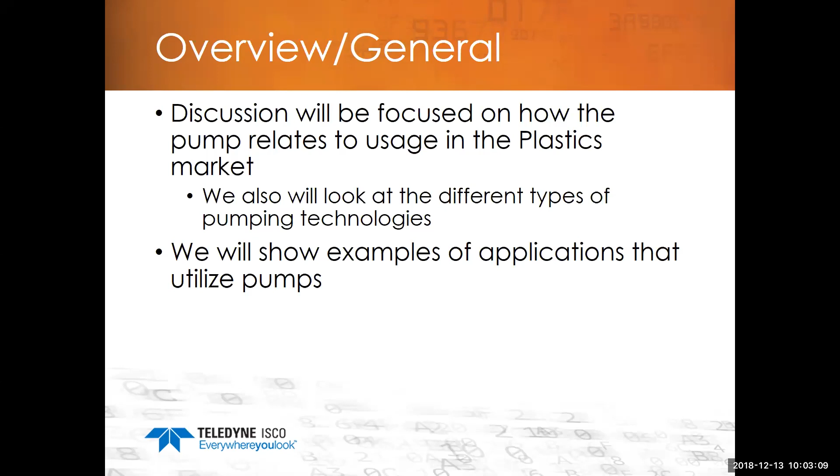So, where do pumps play in the plastics space? There are many ways to utilize pumps. A couple of applications: providing constant pressure to move material around, dosing of material, colors, etc., or injecting CO2 gas or nitrogen gas into the process. There are many types of pumps used in plastics. We will focus on syringe, reciprocating, and peristaltic pumping technology.

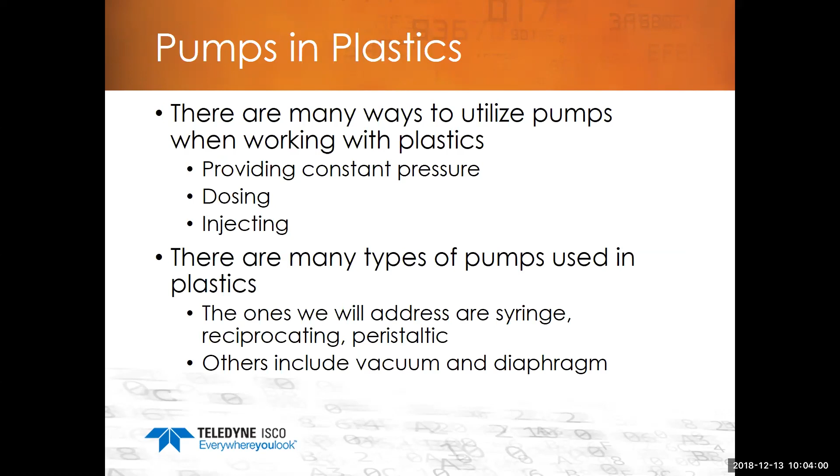Other types of pumps you will see will be vacuum pumps, especially with vacuum forming as a type of plastic product creation, but diaphragm pumps also play a role in that space. So as we look at pumps and how they would be used, you need to consider a few factors of what you're trying to accomplish.

First off, you have to look at the flow rate. How fast do you want the material to flow? With the different pumping technologies on the market, you've got very broad ranges, down to 0.0001 milliliters a minute up to maybe 200, 300, 400 milliliters a minute, or even larger in some types of pumps. So you have to determine how precise the flow you need is, and what the actual flow rate is you're going to need.

And then also, you're going to add, I call them reagents, but you could add colors or mixtures into the process. So you need to know the clarity of that type of material, because sometimes the flow rate, if it's too fast or too slow, can change the shape, the size, the color of the material you're processing.

A second consideration is pulsation. Many plastic processes are continuous draw, continuous flow, so pulsation can greatly affect the outcome. When you're working with an extrusion process, you need to make sure that your flow is very steady and smooth, because even the tiniest blips will impact the material you're creating, or even the colors or the types of things you're using.

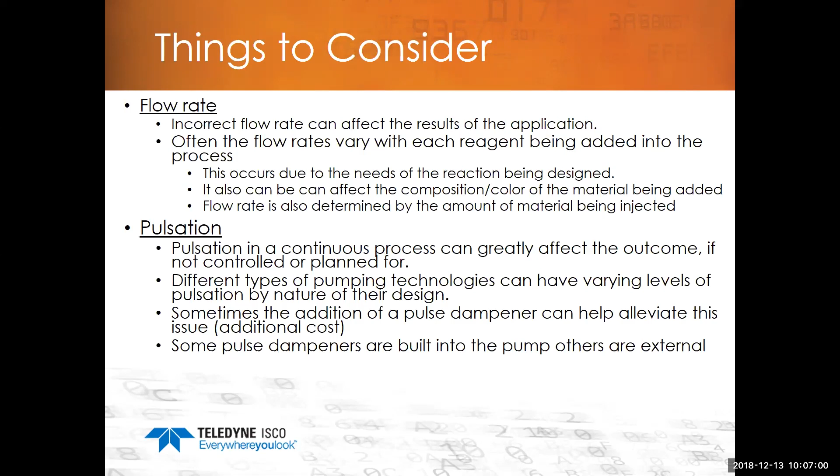Moving on, other things you want to really consider when you're trying to choose a pump or set up a pump in your plastics process is the pressure. The pressure capabilities are very important. In some applications, I know in the rotational molding aspect, pumps are used just to provide pressure, to push all the little materials out into very intricate rotational molds.

So you want to make sure if the mold is very detailed, that the plastic gets into all the crevices it possibly can. So you provide the back pressure of some CO2 or nitrogen to make sure all that plastic gets out into those crevices. That would have to remain constant. It cannot have any fluctuations or dips or changes. So you really want to look for pumps that can do that.

Footprint is a big deal. The pumps vary in size and shape. You'll see that shortly. But you have to look at if you need something that's very precise, or you can live with a little pulsation. Do you have the room where the machine or the process is to set a syringe pump? If you don't need the extreme precision, you can go with a smaller reciprocating pump that can sit on a shelf or be built into the actual extrusion machine.

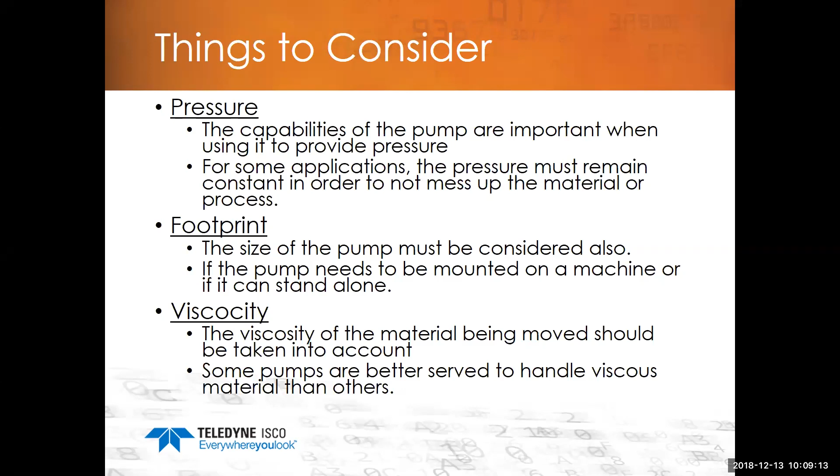So those are things you want to consider, because sometimes that doesn't get thought about until after you've purchased the pump. Viscosity is another thing. Many plastic materials or chemicals that we input into the process, or the colors, the paint, can be very viscous. So you need to make sure that the pump can handle moving it and it doesn't gum up. Again, that's not really pulsation. Reciprocating pumps typically have check valves, and check valves do get gummed up sometimes and don't work smoothly. So you need to make sure it's the right pump for the material you're trying to move.

Other considerations: do you need to move the pump around? We talked about setting it on the machine. Does it need to be disconnected and used in another process? If you have a couple of different extrusion machines and only one or two pumps to share, do you need to be able to do that? Is the pump scalable? Sometimes you have a small process where you're testing out the right color mixture, the right size and shape of the bubble or the foam. Can it be moved up to produce much more? Or do you need to replicate that same line 10 times?

Is it single or dual head? That's a very interesting question, because dual head is more of a continuous flow, so you're going to get a little less pulsation. It's not going to be as precise as a syringe pump, but a dual-headed reciprocating pump does minimize some of the pulsation in the application. And if you add a pulse dampener, you're getting it down as tight as you can. Still not as strong as a syringe pump, but very close.

And then what other stuff do you need? What is the impact on the project cost? That's all stuff we're familiar with. But you want to think about how you're going to be using the pump. It's not just, hey, there's a pump that does this flow rate, let's buy it. You've got to consider, can it get to the flow rates you need, and what do you sacrifice to get there? Are you sacrificing pressure? The ability to move a heavier, more viscous material? Those are things you need to weigh when laying out your process.

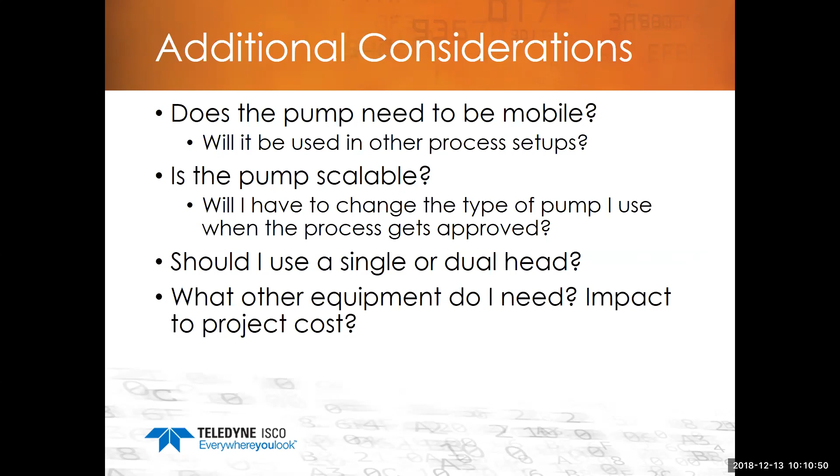So let's talk about a couple applications where we currently participate. Chemical color additive to the extrusion process, especially twin screw extrusion. We have an application diagram a little farther in the presentation to show you how we play there. It's color additive, it's also adding CO2 to the process. There are many different ways we participate with extrusion.

CO2 usage for foam processing. We have an organization up in Toronto, the University of Toronto, that does a lot of research with foam creation, and they use our pumps in their processes and in their research. Many of their doctoral students will present to vendors and customers, and they prove their thesis using the syringe pump.

Polymer pulling, especially hollowing out polymer tubes. We have a couple universities across the country. Georgia Tech is one of them, and University of Nebraska-Lincoln here is doing research on using polymers for different types of applications. And they're actually using two of our pumps to create the polymer tube and then inject a fluid into the middle to hollow it out, so then the tube can be used for something else. So these are a couple applications. We're going to talk about some of these as we go over the next few slides.

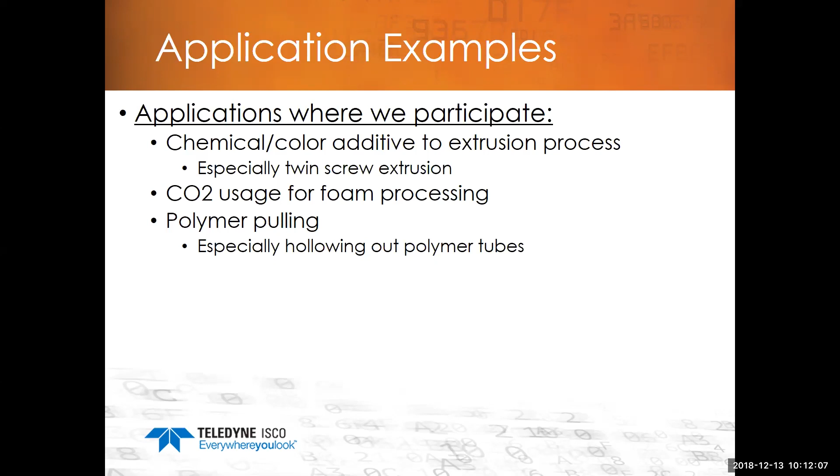Here's one here for polymer creation. This application here, any of our pumps, and you can see right just above the bore fluid there, the little diagram says syringe pump. Universities, as I said, are doing the research for polymers across the globe, and they're employing our Teledyne D-series syringe pump in that process.

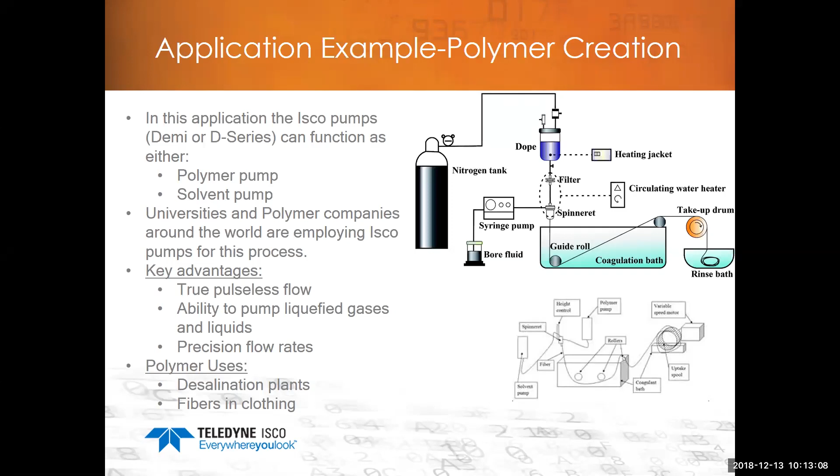Why? Well, there's true pulseless flow. We talked about how if you're pulling a polymer strand, you need that to be as smooth and pulseless as possible. You can't have jagged blips or anything else, because that would ruin the material or the actual polymer. It can pump liquefied gases, and it's very precise down to the flow rate. So that's very, very important when you're looking at polymer creation. Some of the uses for these polymers, we talked about creating the polymer tubes. Well, you can tie them together and use them in desalination plants and other types of things. So let's go to the next slide here.

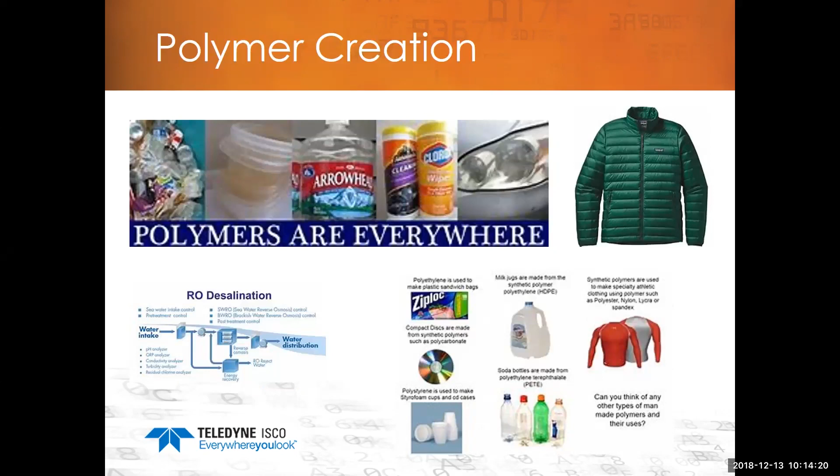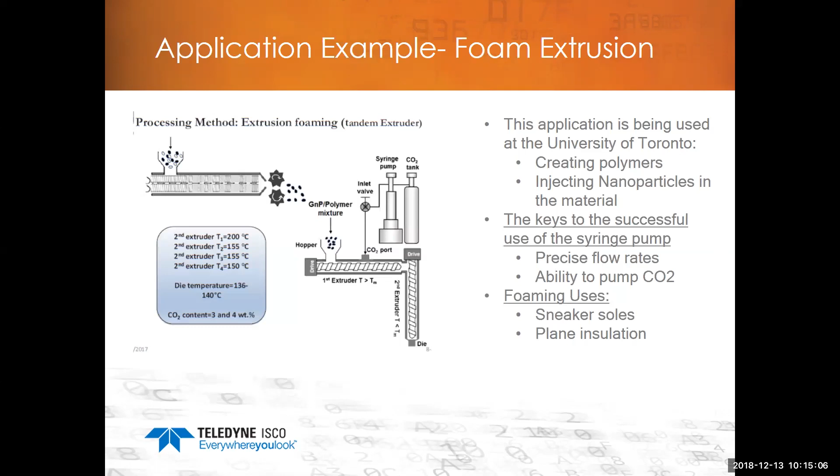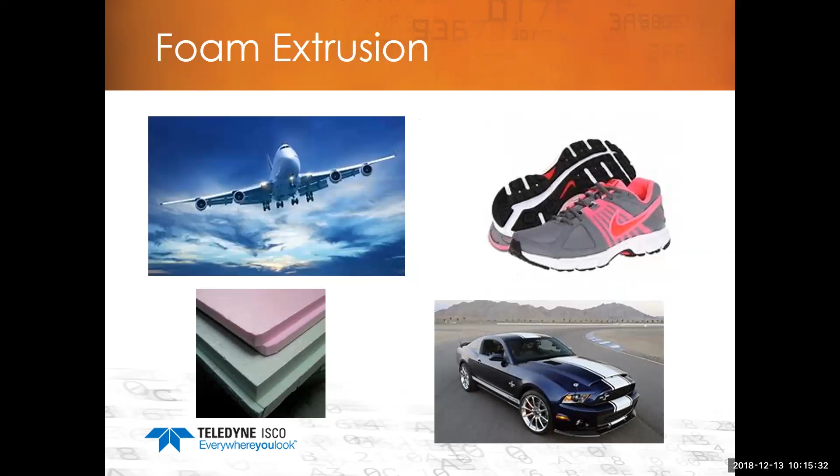So these last two applications are very focused on the syringe pump technology and how precise and pulseless the flow rates are. This is part of the foam extrusion process, something you need to stay aware of. A couple of things that come out of foam extrusion: the insulation in airplanes and some cars down below, the sound deadening, etc. Sneaker soles, many companies create soles with compressed foam, and obviously styrofoam panels. They can be used anywhere, right? So these are just a few examples of everyday things that are using the process where our syringe pumps supply.

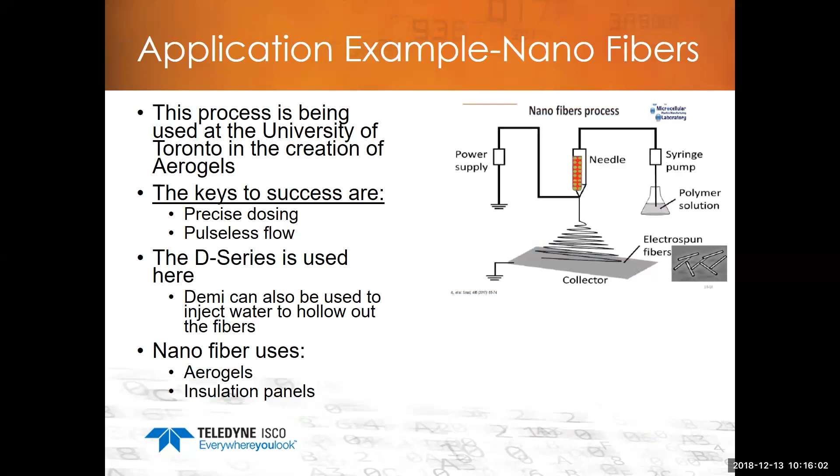As we keep going here, we talked earlier about nanofibers, or injecting nanoparticles into a material to reinforce it. The whole carbon nanofiber reinforcement of products or walls of cars is very real, and it's something that's happening quite a bit. Again, the University of Toronto is doing some work in this space, and they needed the precise dosing and pulseless flow. So there we go. It's perfect for a D-series.

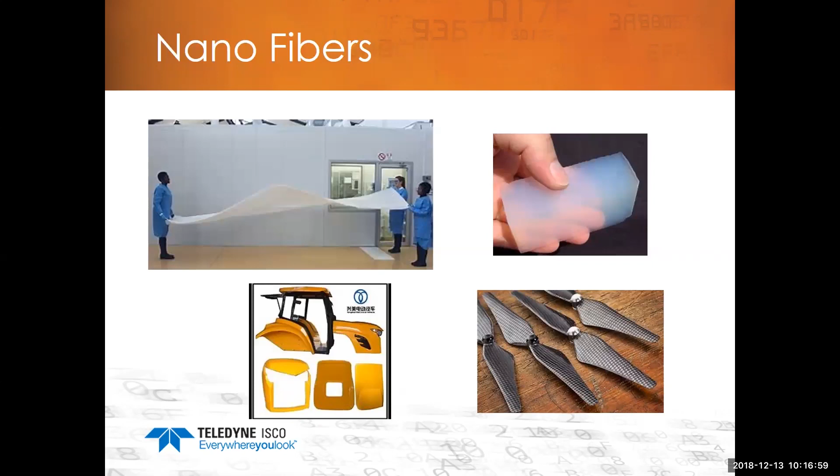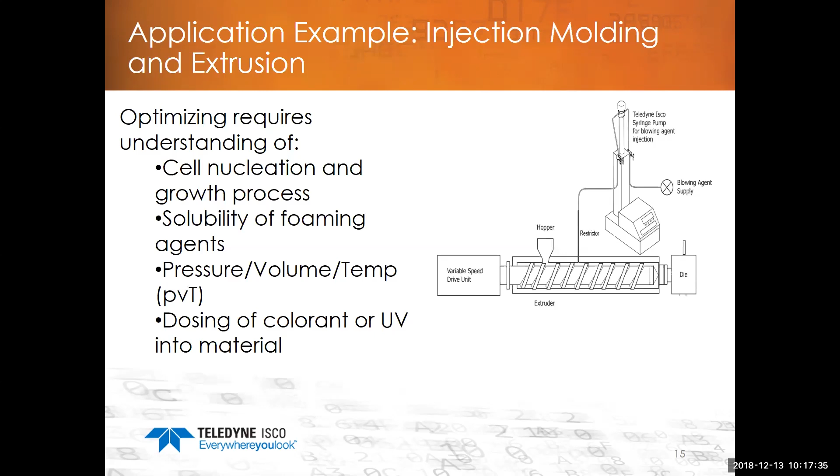Next one we have, injection molding. This is actually an application note we have that is showing you how to use pumping CO2 as a blowing agent through the extruder. Some of the other things that would happen here, in this case, you could use a small reciprocating pump that would add color or UV protectant to the extrusion process. So instead of worrying about the pellets and everything for the color, you can just inject liquid into there, and it'll get smooth and run through the process.

Some other applications that we haven't really talked about. It's not necessarily plastics, but it is kind of in that vein, is using the D-series or a ReaXus with a pulse dampener to put a protective layer of silicone onto semiconductor wafers. That's a very smooth, straight process, and as the semiconductor wafers come out, they get coated with the silicone.

And then, as I said earlier, they're providing pressure to the rotational mold machine to ensure the material gets into all the detailed crevices of the product that you're trying to create. Because sometimes as we start to use more plastics and find more ways to use plastic material for things, the molds will get much more intricate.

So as we kind of tail up to the end here, let's talk a little bit about the different pumping technologies, and let's talk about advantages and disadvantages of them, and try to relate them back to the plastic space. So first and foremost, we're going to talk about syringe pumps. Shocking, right? Because we talked about the examples in some diagrams previously.

Well, syringe pump technology is a long-lasting design. It's pulseless. You have very, very precise flows. You can get some really high pressures. You really won't need too high of pressures in the plastics process from a pumping standpoint, but it's there if you needed it. Some of the drawbacks are there's an expensive initial investment. Not going to lie about that. But so is an extrusion machine. That's not exactly cheap. So the product will fit in there nicely, and it's got a large footprint.

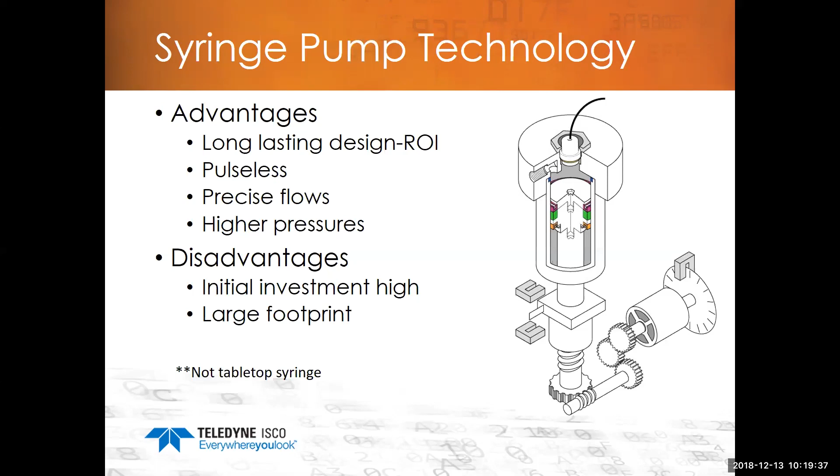Next type of technology we'll talk about is reciprocating pump technology. You can get up to some pretty high pressures there, up to 10,000 PSI or even more. It's a little bit lower flow. It's a very proven, common design. Very simple, kind of like a train engine, right? Chugging back and forth. The drawback here is it struggles with viscous fluids. As we talked about earlier, viscosity is something you really need to consider when you're selecting the type of pump you want to use.

Reciprocating pumps typically use check valves. They do tend to jam up sometimes with some sticky or viscous fluid. So if you're really concerned, or if there's even an outside chance that the viscosity is going to be kind of touchy, you need to maybe look at either a different pumping technology, or be aware that this is going to happen and build something into your process to be able to check the valves or to keep things clean. And it's not pulseless.

On the pulseless continuum, the D series syringe is going to be the best, and reciprocating pumps would be next. You can add a pulse dampener to help that, but it will not get it down to the levels of the syringe pumps.

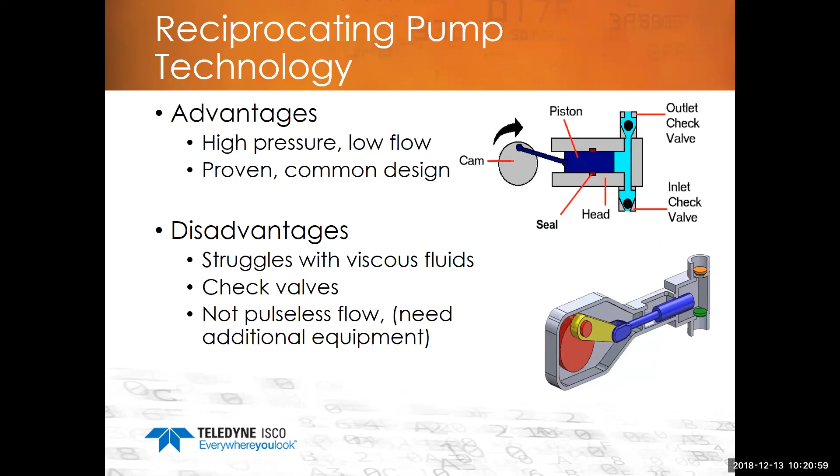When you look at what Teledyne ISCO has, we have two different types of reciprocating pumps that would be really good for this market. Here is just a very basic model. It's built to just move fluid, move material. It's 100 mils a minute, 2,000 psi with an optional pulse dampener. Very generic, all-purpose pump, low cost, and will fit very nicely on an extrusion machine or any machines you have nearby.

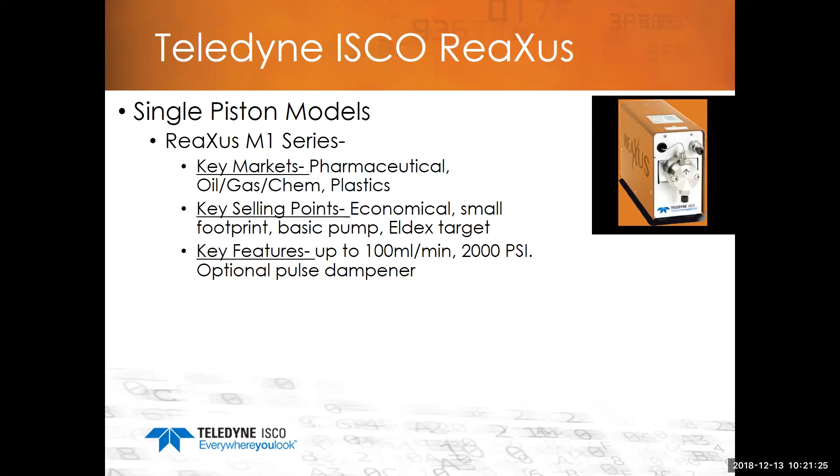The next one here we talk about is our PR series, and you get up to about 300 mils a minute, about 4,000 psi. So you have a couple options. This is a dual piston one, so we already talked about the continuous flow. This will have better pulsation capabilities than the M1. So this is something to consider if you need to move those types of flow rates.

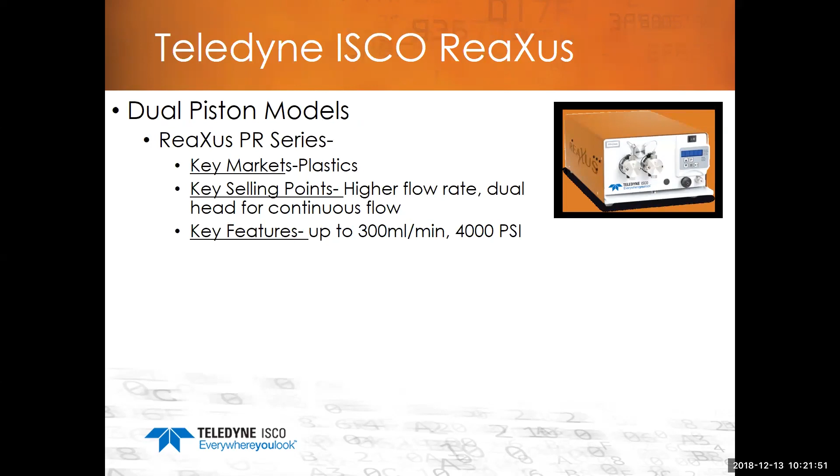The last pumping technology we'll talk about here is peristaltic technology. So here's one, this is quite interesting. This technology is designed to move very viscous fluids, sticky, kind of slurry type stuff. So it's a very simple roller squeezing something through the hose. There's no wetted parts. You can change the head if things get stuck up. You can change the hoses. Very low downtime, so easy to maintain, easy to change.

Disadvantages sometimes: with the materials you're pushing through, along with maybe the viscosity, the hose life wears. Because if it's harder, it takes more pressure, it takes more effort to squeeze, the hose will show some more wear. It's not pulseless. If pulsations are concerned, you're not going to get down to where you need to be. But if this is just simply moving some material to a spot or injecting into the machine, and the machine itself will do the dosing out, you're fine. This will be great for you. Typically, they're smaller footprints, and they'll fit on machines quite well.